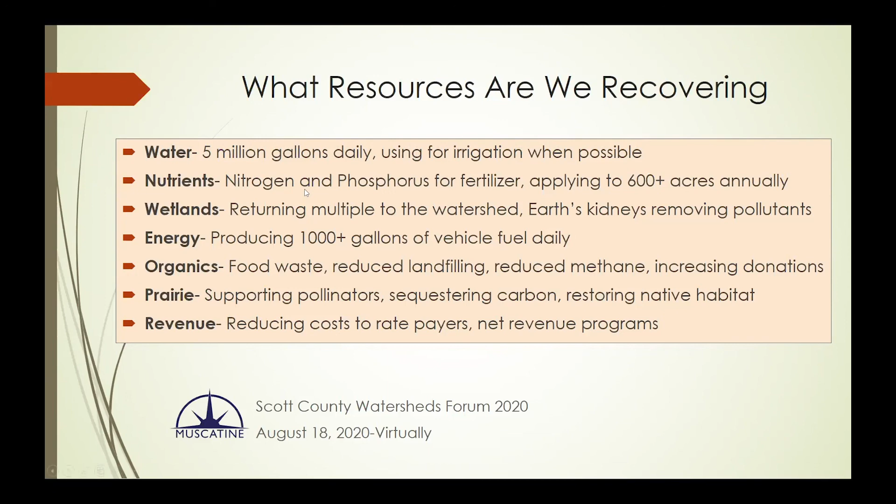And then, of course, we're going to recover some revenue. These projects that we're talking about are actually revenue positive, and everybody in town likes to hear about that. If you want to know how to do that, we can show you some of these things.

So the number one thing we have is the water recovery that we're doing - this nexus we talked about, and what's described as the utility of the future, today. Future utilities, when they're built, are not just going to be wastewater treatment facilities. They're going to create energy, recover nutrients, and reuse the water that comes in, to make us more of a sustainable utility.

So for irrigation, we can actually send this water out to some farm fields about 2 miles away. We pump our biosolids out to these lagoons that hold our biosolids all year long, and then we land apply those. Well, we could use the same pipe and the same lagoons to store water all summer long, and then we can actually irrigate the farm ground around that area.

We do have a study going on right now to hopefully tell us that it's going to be feasible to do that. We'll see here in a few months when that study is completed, but you get higher crop yields from that.

The fertilizer—there's nutrients in the water, so the farmers can reduce the amount of fertilizer they have to apply, and it helps them protect against drought periods.

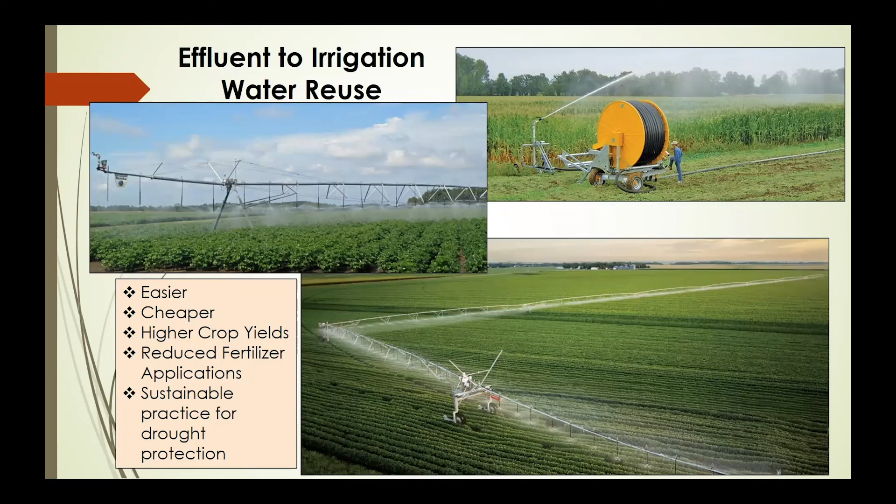The next thing we talk about reducing or recovering are nutrients. Why would we do that? Well, because we actually produce a lot of the nitrogen and phosphorus that comes out of that center part of the country. If you see all the colored states there, every single one of those actually ends up dumping out into the Gulf of Mexico through New Orleans, through the same point. You may not think it would, but most of the states in the nation actually end up dumping out through the Mississippi Basin. So when we are the ones producing most of the nitrogen and phosphorus in our area, we are going to be the target of lots and lots of projects that need to be done.

And of course, the reason that needs to be done is because of what's called Gulf hypoxia, or the dead zone. If you look at the picture here and look into the Gulf, you see that yellow area and the red along the coastline, and even all the way out into this area where we have oxygen depletion in the Gulf itself. Because of that, we send nutrients down the rivers into the Gulf. The algae grow and then die and fall to the bottom, and bacteria down there are anaerobic and they suck all the oxygen out of the water.

So you could say it affects each and every individual farmer, but in very small amounts. But when you take the collective land area that we have out there, you can see that it does have a very big effect on the Gulf.

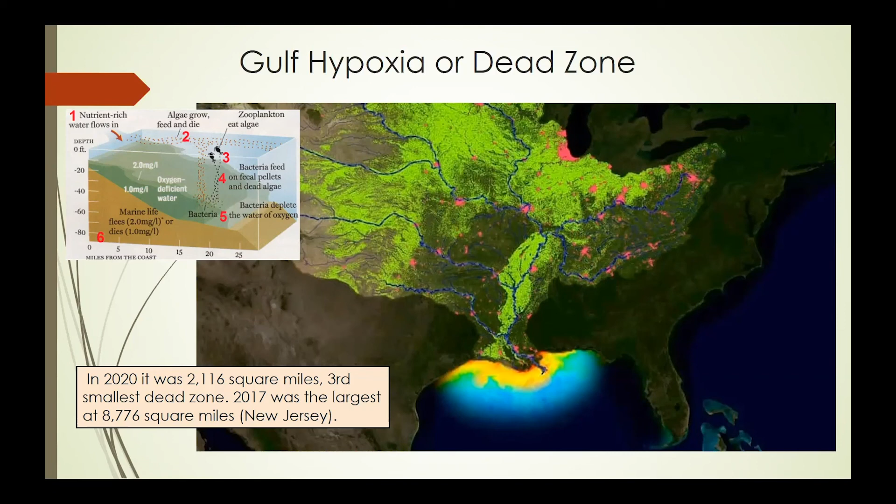So we're going to try new things. Some of these are requirements within our permit. We have a permit from the DNR to discharge, and now they're starting to add things that have nutrients attached to it. We have to report the feasibility, evaluate our operations to see where exactly we can reduce nitrogen and phosphorus by 66 and 75% respectively. But we are allowed to select the way that happens, report it out, and say, here's a way that we want to reduce nutrients in the watershed surrounding us, or where we have an effect.

One of the better ways to do that is within the watershed through these wetlands or through other practices, even edge-of-field practices or anything else like that, and then we can get credit for that. We can take that instead of having to do really, really expensive projects here at the treatment facility. We can actually affect a greater reduction outside of our fence line and find better ways to do that—it saves us money, reduces more nutrients, and helps the farmers become more sustainable in their practices as well.

So this is kind of a neat thing. Dubuque has actually gotten the first permission to do this. They have a letter of understanding, which is about as close as we get to permission to have this trading procedure going on, but it is happening. It's very exciting, and Muscatine is hot on the heels of the DNR to get this done as well.

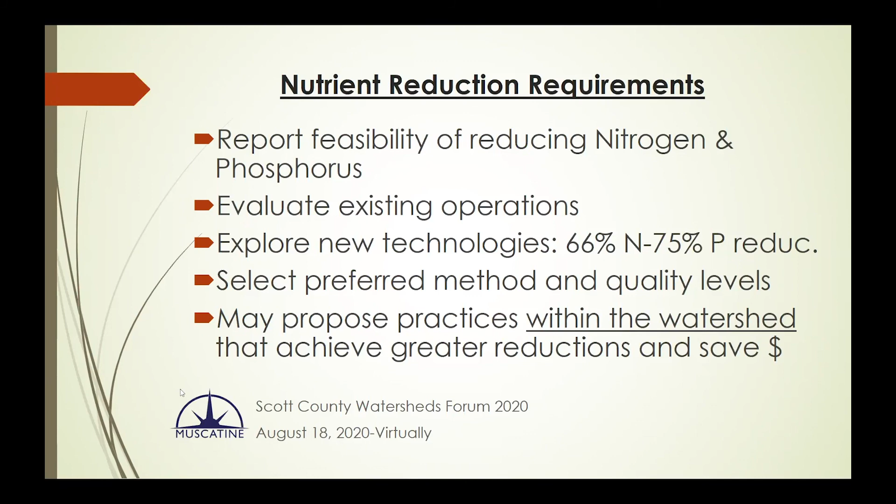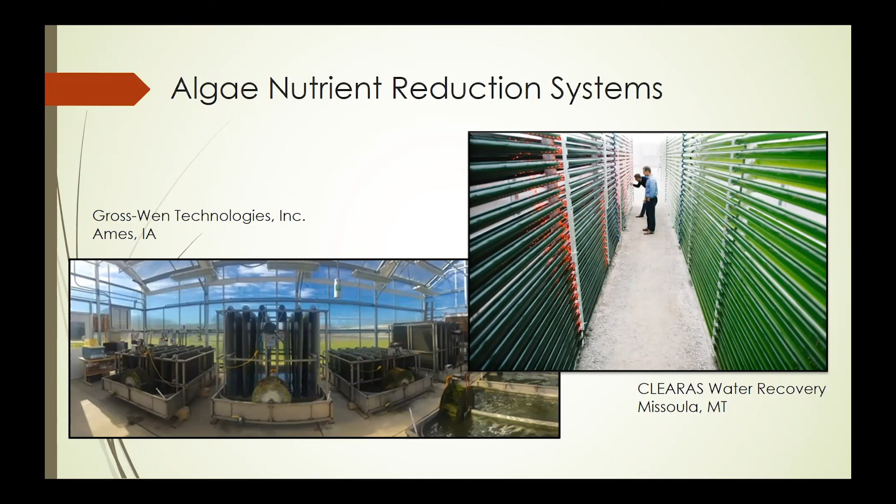One of the other fun ways we're looking at doing that is through using algae itself. Locally, we can take our effluent and run it through either big glass tubes, or through these serpentine belts that dip down into the effluent, grow algae, and then we scrape the algae off—that algae has captured the phosphorus and the nitrogen. There are other means of doing that mechanically. Otherwise, we'd have to do some really, really big, expensive things within our own treatment facility that only take care of a small percentage of the problem. So we're really trying to look outside of our fence line to do that.

And one of the best ways to do that is through wetlands. If you don't know about wetlands, I'm sure most of you do. But the main function of these is to take ag or urban runoff and run it through a natural process to remove these nutrients.

So you have the first sediment basin, which actually takes out the heavy sediment where a lot of the phosphorus is stored. Then you have plants along the way that actually uptake the rest of those nutrients as it sits in the wetland. And of course, the biggest flush of nutrients comes out of the first 1 inch of rain that comes down, so you always have this high flow bypass so that the first flush of water that comes off of a field or out of your town will go to the treatment process.

But then as it continues to rain, as you get more and more water coming down, it doesn't just wash out your whole process. If you try to put all the water that rained through a wetland or any kind of stormwater practice, you'd end up washing out all the nutrients and all the good stuff that you had stored. So you have a high flow bypass as it keeps raining to go around the practice. But these are just some of the things you can look on to see what happens inside of a wetland that we're trying to encourage.

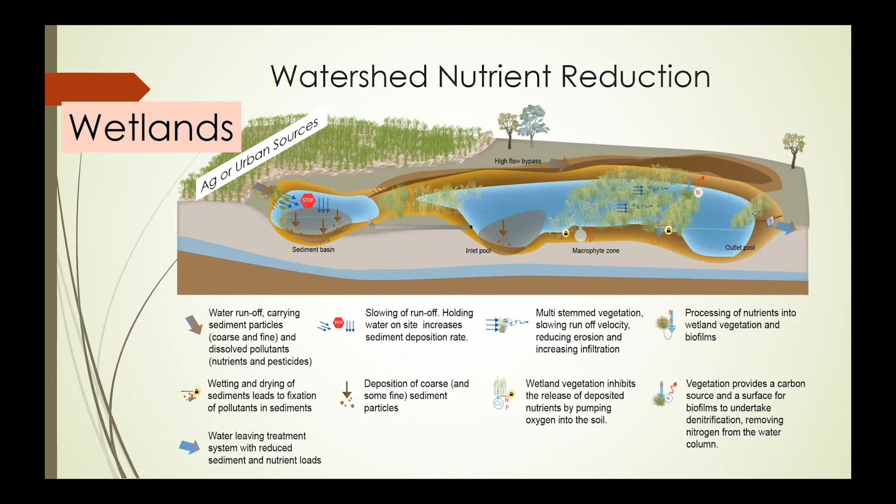So those wetlands hopefully will be able to take a lot of those nutrients, and we can get some credit for that to say that we have reduced the nutrient load to our watershed without having to do something in our treatment plant. This is a really fun area, actually.

The Muscatine Pollinator Park has just been a real joy of mine to develop. It was an old ag land that had been sitting fallow for a very long time. We just mowed it, or the city mowed it for weeds, and eventually somebody asked me to mow it, and then I said, well, I want it for something else. And so we have converted it into a park where we have many, many acres of restored prairie, woodland restoration, and of course these two wetlands that we're going to be using here.

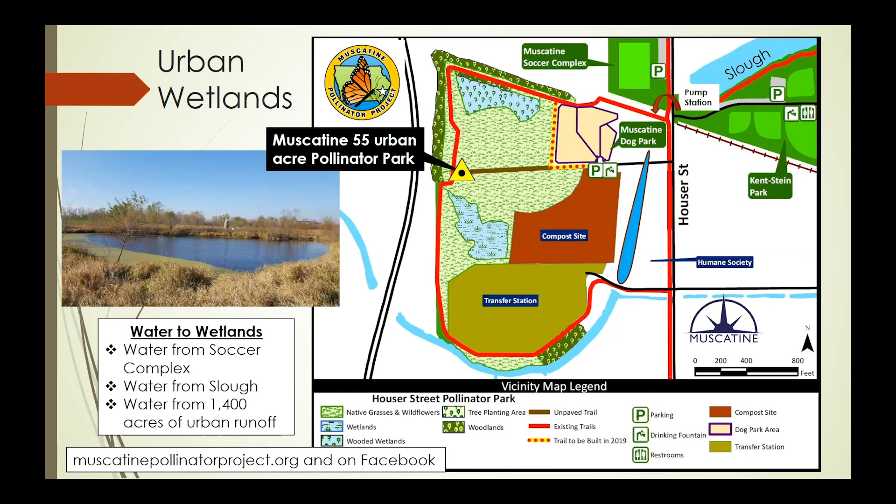So the big thing that Muscatine has really been doing here lately is our energy and organics recovery. We created a program called MARRVE, which is the Muscatine Area Resource Recovery for Vehicles and Energy. This is a food waste recovery effort that we have been working on for, gosh, 7 to 8 years now, 3 years really in the design and construction. So we finally finished that and have been running this facility since February of this year, and just going gangbusters with it.

So we want to make sure we encourage that, and that we're not just trying to take in waste to make energy out of it, because the most important thing would be to link people up or feed the animals that then feeds the people, right? So we're kind of sitting there in the middle, this industrial spot.

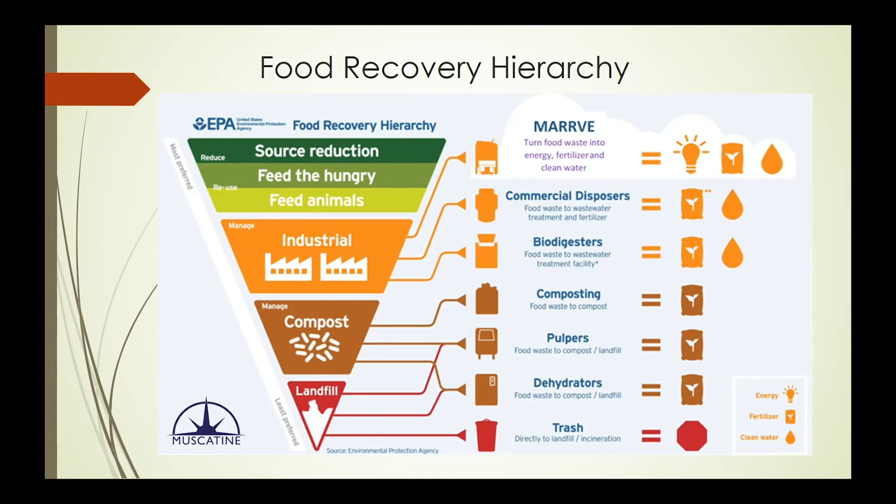They thought we were on fire, but it's actually just burning off the methane from our anaerobic digesters. When I saw that, I said there has to be some way of using that energy instead of just burning it off. And we did. We're looking at that very closely right now.

When I started seeing 10 tons of food waste a day from one industry going to the landfill, we said, okay, we've got to figure out some way of getting that food out of the package and into our digesters so we can make more energy.

Because unfortunately, it looks like there's a lot of energy and flame coming off of that, but we're actually a pretty small fish in the larger ocean of energy projects, and nobody really wanted to help us out or pay much attention to us until we produced more biogas. So that was where we headed next.

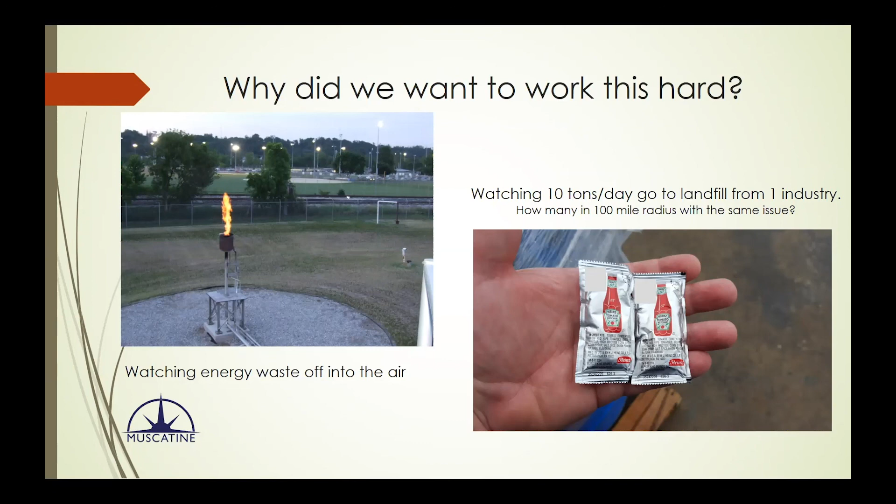The reason why we weren't going to get anything done is because you either have to have a grant, a mandate, or what I like to call a screw loose. We probably fall into that category.

It's really easy to do things when you get a grant, because they just dump some money on your plate and say, here you go, make a project—like they did in Janesville, Wisconsin. No offense to Janesville, they did a great job, but they had a lot of money given to them to do that. Or if you live in California, like the San Diego Food Bank, they have a mandate.

They cannot throw food waste into the landfill—it's against the law. It's coming up, not completely implemented yet, but they're scrambling to find ways to deal with this food waste once they take care of it. All the way down to the food banks, they had to buy something to actually depackage food they received that they could not give to people because it expired or spoiled.

And then of course the other part of the picture is just people who want to do it because it's the right thing to do. There are a few of us, not many, who have this screw loose mentality of just going out there and doing it anyway. I found one in Hermitage, Pennsylvania. Other than that, there aren't very many of us really doing the big things we're talking about.

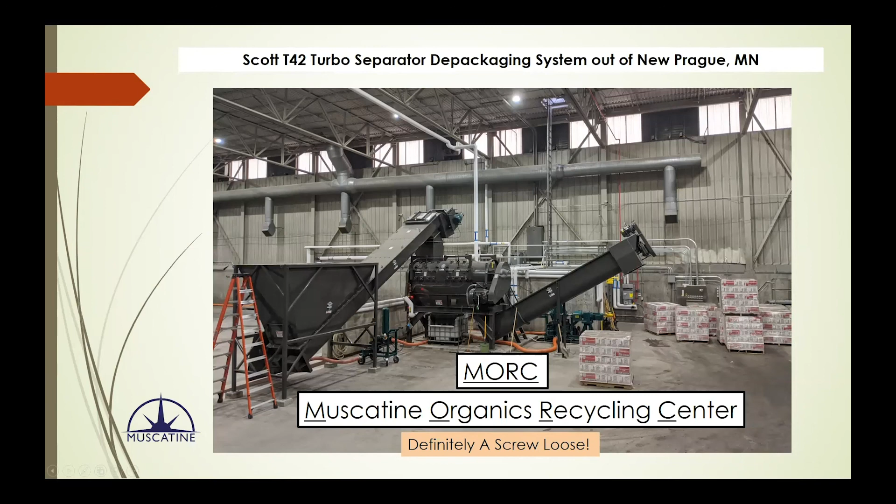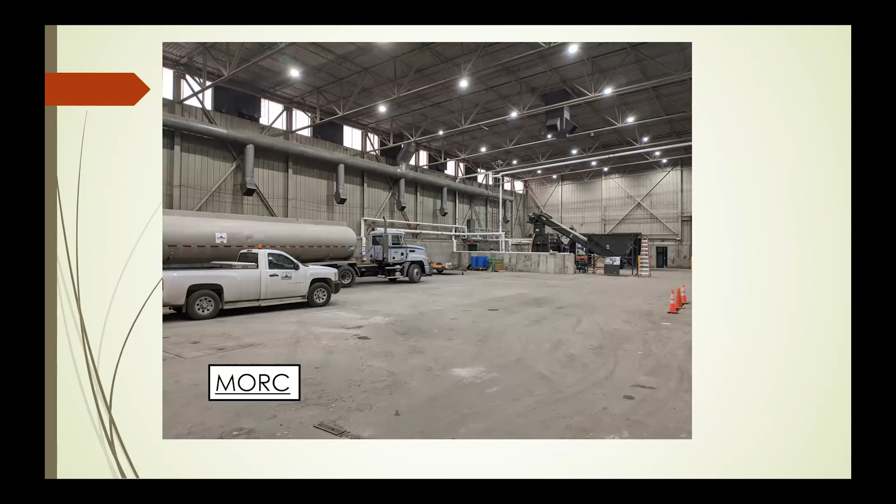They'll take a raw head of cauliflower, but then here's a head of lettuce wrapped in plastic, and they don't want that one. So we're able to collect a lot more than just the typical composters can accept. The waste that they're able to divert to beneficial reuse has really gone up, which is great.

So we go from that to this, and this is actually just packaging - all that food has now been recovered out of the packaging. We can get between 90 and 99% organic removal from our packaging, which is really good. So that stuff didn't have to go to the landfill.

I have a little video here.

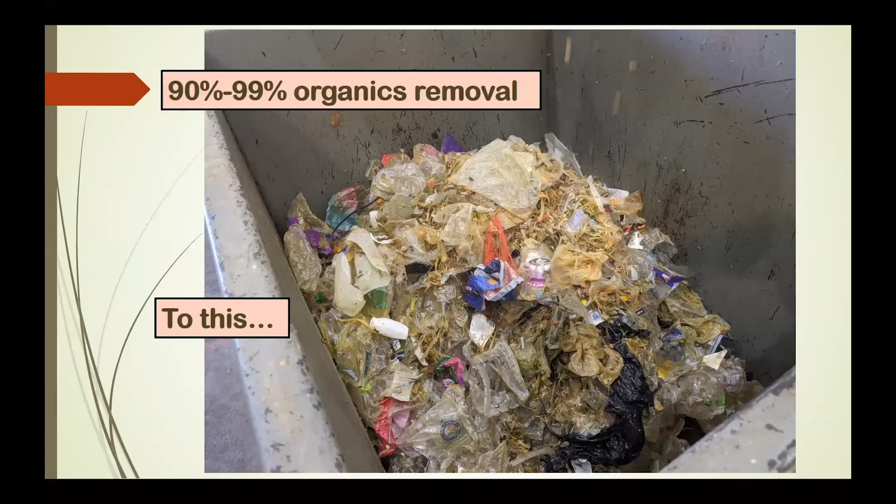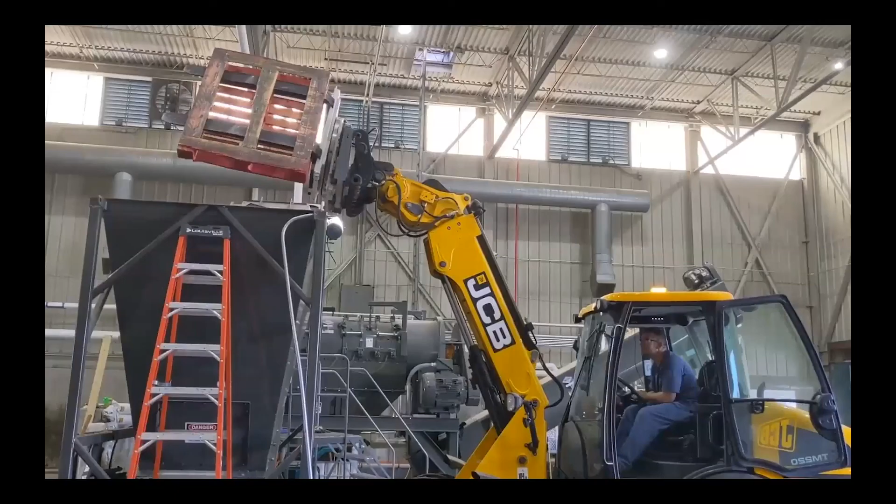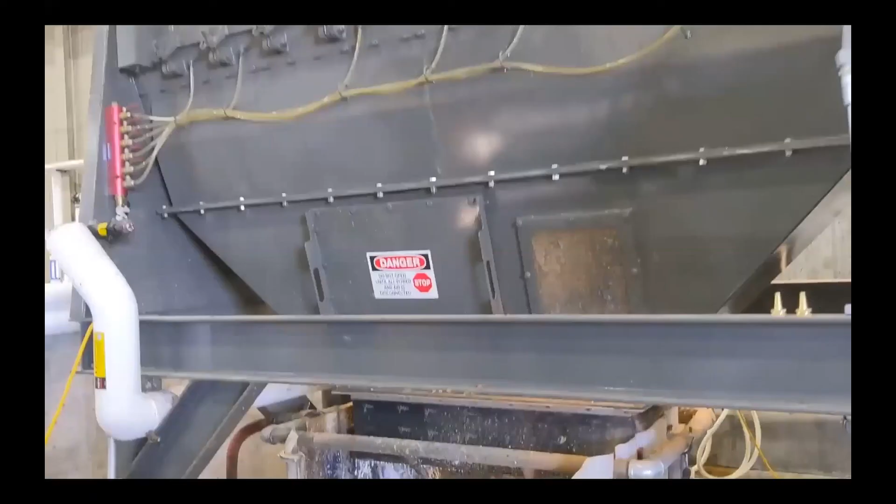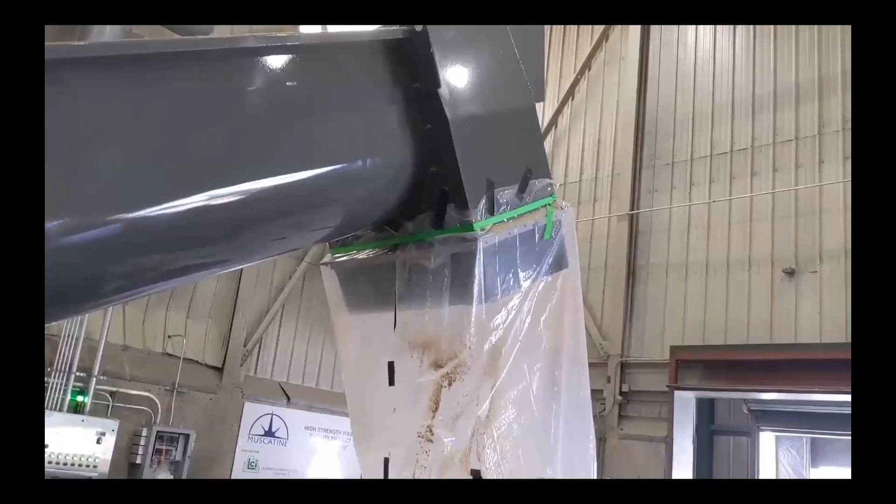We are ready to load a case of milk in cartons, filled in their boxes. No problem for the T42. The operator will load it into the feeding hopper by rotating the fork, dropping the material into the feed augers, which lifts the material into the machine. Fork rotates, the material goes in. Then set up the auger into the T42. Milk comes out the bottom, where it is then pumped to a tanker for delivery to the treatment facility. The waste cardboard boxes go up this auger, comes out this chute, and is dropped into this bin for disposal. That's the only part that will actually go to landfill at this point, and hopefully we can do something with it later.

Oops. Now I have to figure out how to go backwards. Here we go. Okay. Whoops. Yep, that's not going to do it, is it? Sorry everybody, don't get dizzy watching this as it goes by.

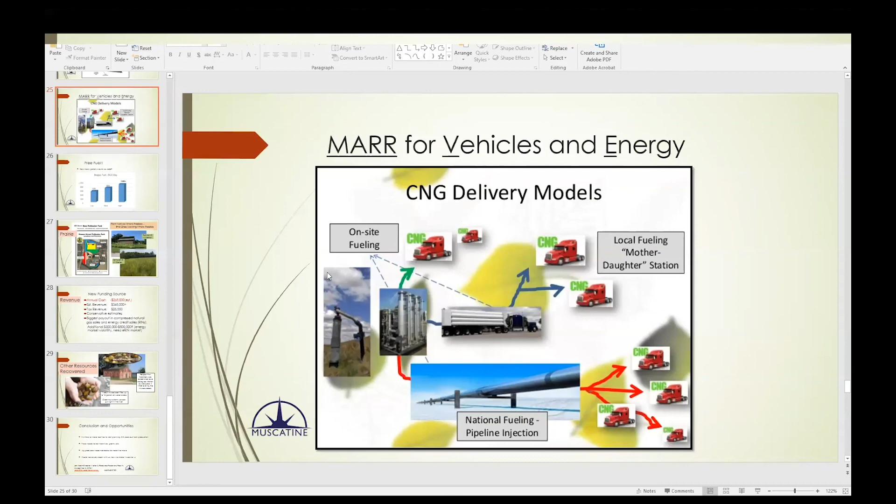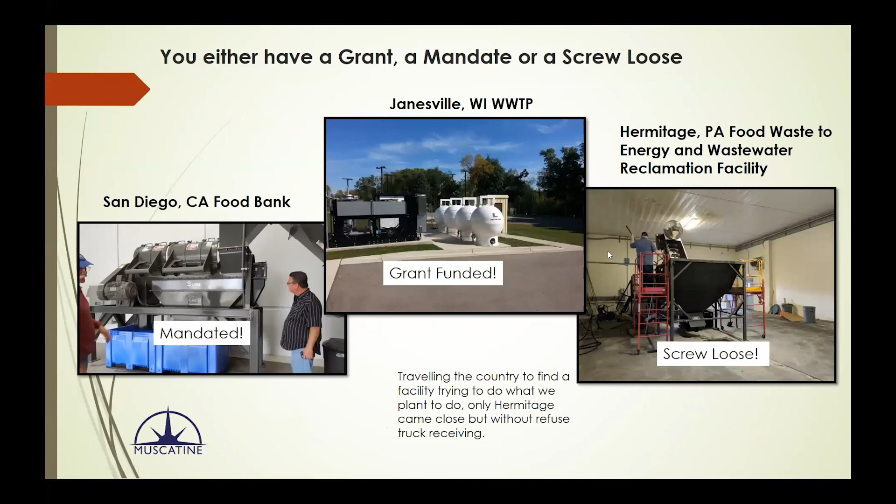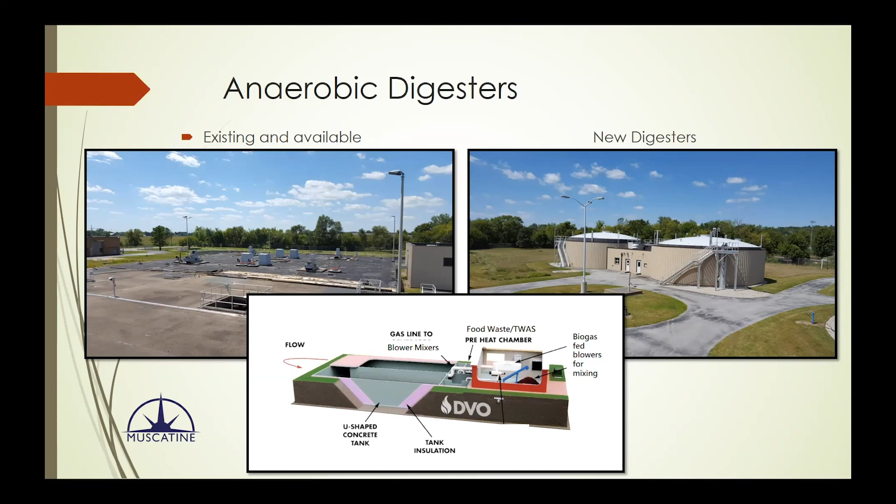Now what we're going to be able to do is actually convert one of those - there's 4 of them there, they each hold about 400-some thousand gallons - to what you see below. It says DVO on the side, and it's actually a different kind of anaerobic digester. I don't want to get too far into it right now. If you ever come down and want to know all about anaerobic digesters and how we're changing those around, I'll be happy to talk to you about them. But they're actually used in the agricultural industry an awful lot. They help break down large quantities of high-strength waste, and we're going to use that because it fits better with how we are already set up to take that waste, instead of building brand new digesters like we have on the right.

So this is, of course, we talked about MARR being Muscatine Area Resource Recovery for vehicles and energy. So the vehicle and energy part of this, we're talking about converting that methane to CNG, or compressed natural gas. I actually like to call it RNG, renewable natural gas, and we can actually compress that and put it into vehicles that are set up to take natural gas, like these trucks.

This is happening a lot in different parts of the country, mostly out in California, where they have a lot of issues with emissions and things like that. So we can actually compress and inject this into the national pipeline. People can off-take that as fuel for their trucks, and then we get a credit for it.

It's a pretty neat process of how we do that. This is actually a carbon negative fuel because we have taken what would have created a lot of methane and made a fuel out of it that now only burns carbon dioxide.

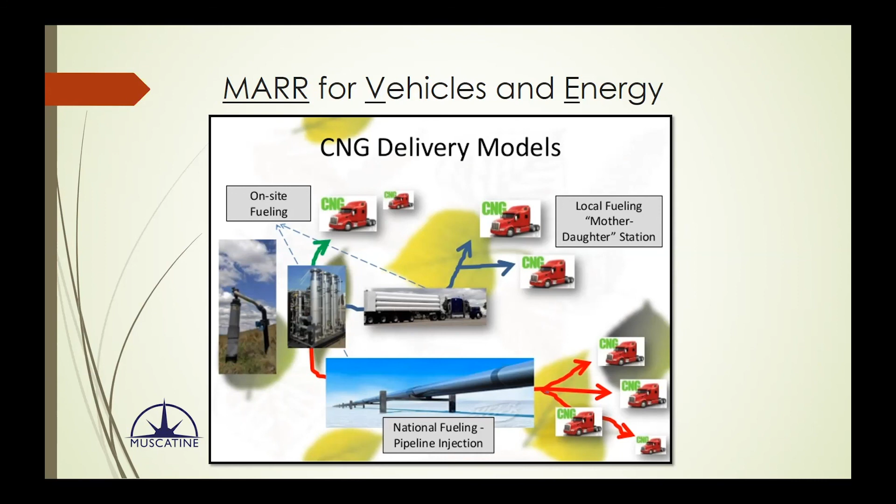So it's a carbon credit that we get for that. But this is where we are heading with this, we hope, to the tune of about 1,000 some gallons of fuel equivalent a day that we're going to be able to create here. Remember how I said that your utility could say they could make 1,000 gallons of fuel a day? Why aren't they doing it? Well, hopefully more of them will start doing that because we're pretty small potatoes, and I think other larger facilities can make a lot more than we can even.

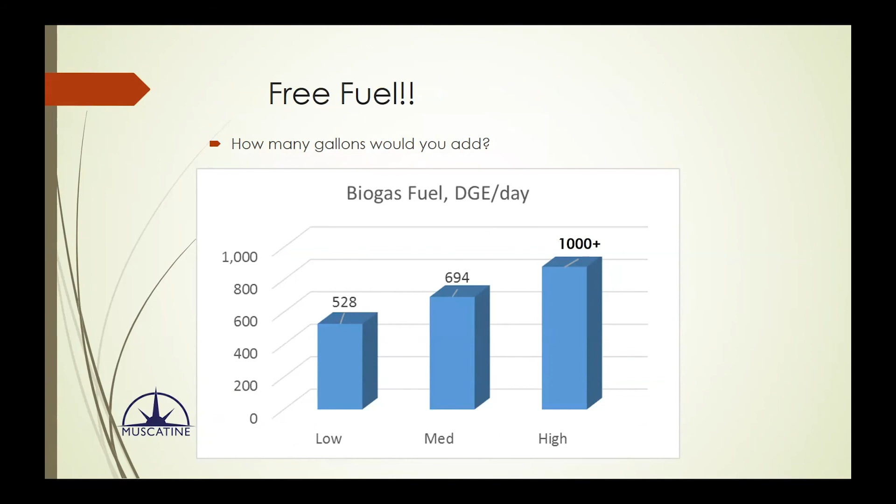So we try to do that as many places as we can. We have over 100 acres now dedicated to prairie within the city of Muscatine, and growing.

And then, of course, the final thing that we like to say we're recovering is revenue. There's a lot of this waste that we bring in, of which would just be going to landfill. Now we can actually convert it, and we can make some money for the city out of it, which everybody likes. And this is how these projects really get done, because we can say, look, this is not a revenue negative, it's a revenue positive project, where we're actually going to be able to say we can pay to take care of this project ongoing.

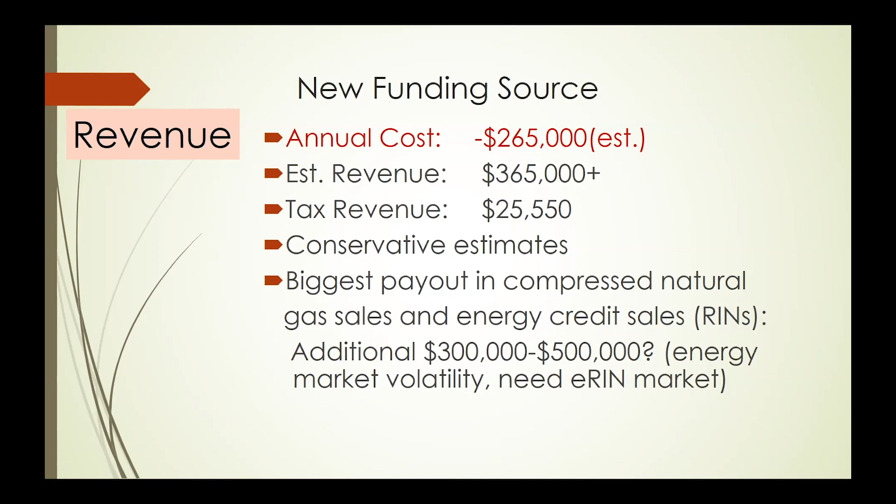One of the other resources we're doing is the Mussels of Muscatine. This is a program of volunteers that started out, which I'm involved in, but the city is actually helping this program move forward so we can recover these old buildings that have historic value related to the clean water initiatives that were happening in Iowa a long time ago. They didn't know that's why they were doing it—they were trying to figure out why the mussels were all dying and how to get them back. Well, it's because we harvested them all to make pearl buttons, and then we dumped toxic industrial waste into the Mississippi River, and believe it or not, all the mussels died.

But these things were so prolific back in the 1800s that old riverboat captains used to gripe about them because they were so abundant it was hard to navigate through. If you can imagine how clean that river must have been at that time, with billions and billions of these mussels in there, cleaning the water as it came down—one of these little mussels can clean 15 gallons of water a day. So imagine, if we can get these back into our rivers and stream systems, how much water can we clean?

Passive cleaning—there's no energy involved, there's nothing we have to do. These little creatures, if we support them and get them into our rivers and streams again, how much cleaner our water systems can really be. The potential is just incredible. So we're encouraging that, and we're working with as many of these groups as we can to get these things back into our ecosystems.